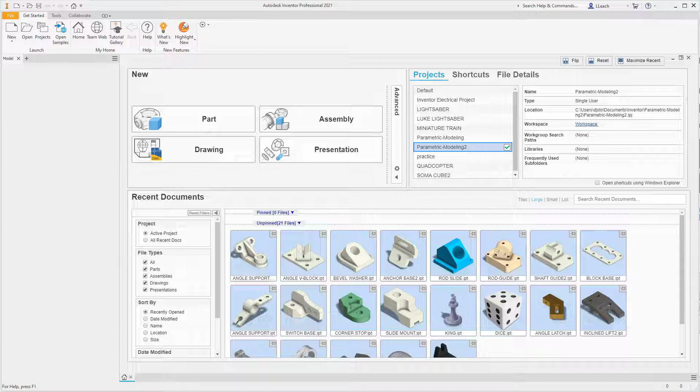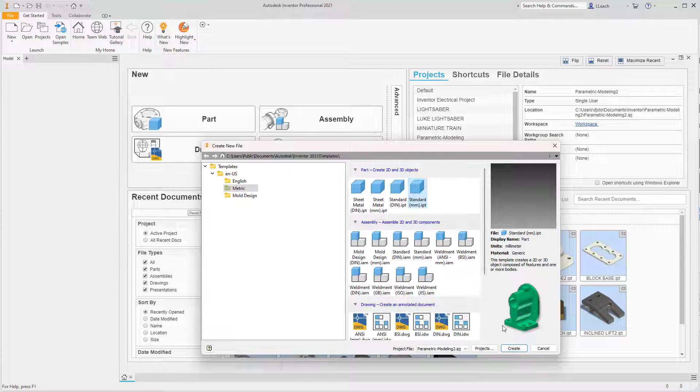What we're going to do first, we're going to go up to new. This one is going to be metric, so we're going to do this in millimeters. Metric, standard millimeters. I'm going to hit create.

I'm going to start my 2D sketch on this YZ plane, because we're going to get jiggy on the YZ plane. Then what I'm going to do is just start by drawing using the line tool.

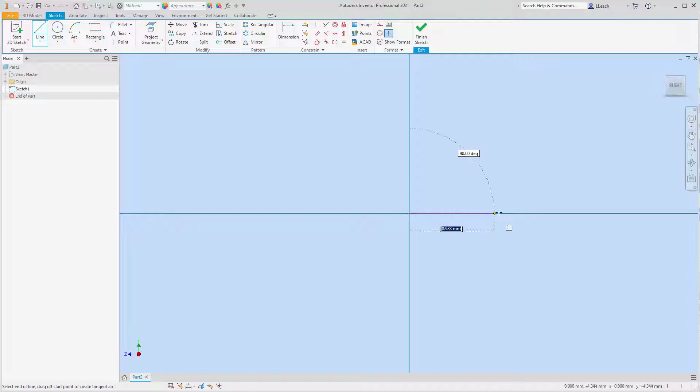Let's see, what can I do? I'm going to start it here at this center dot. I'm going to drag over to the right and then down. I'm going to come way over here. I probably should have drawn this bigger. I'm going to come up a little bit, over to here a little bit, and angle it up to here.

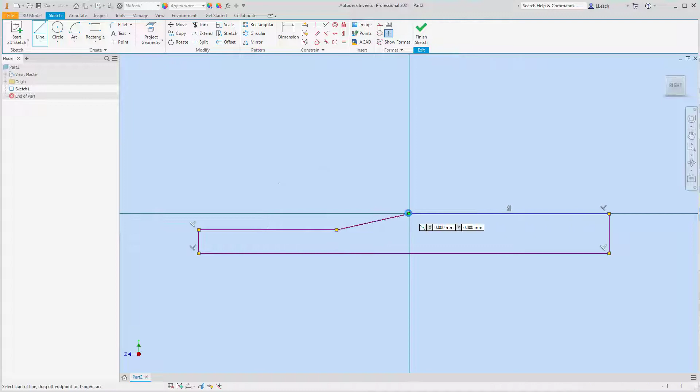That's probably the worst sketch in the history of mankind, but now I'm going to add my dimension. So this dimension here is 100, and I was not even really close. 100.

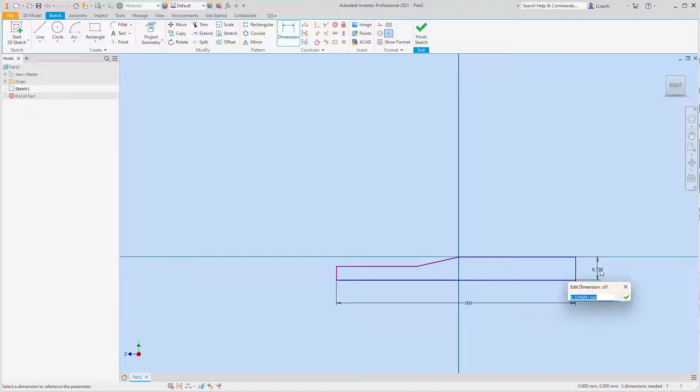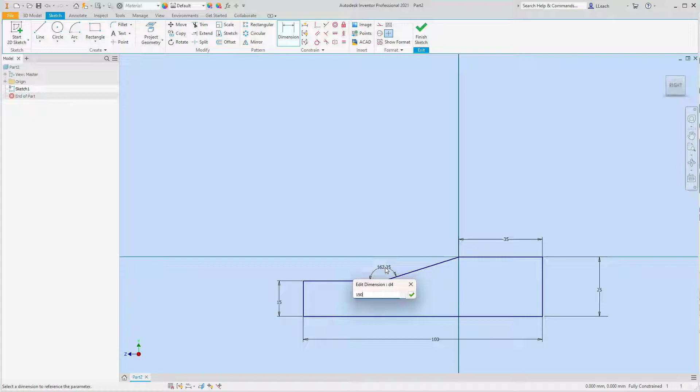Millimeters. This is 25 millimeters. This here is 15. Let's see, here from here to here is 35. And then I need that angle. Oh yeah, so the angle from here to here, this angle is 150. So there's our kind of side view.

What I'm going to do here is finish my sketch. I want to extrude this, extrude it back the other way, and that has a depth of 75. Hit OK.

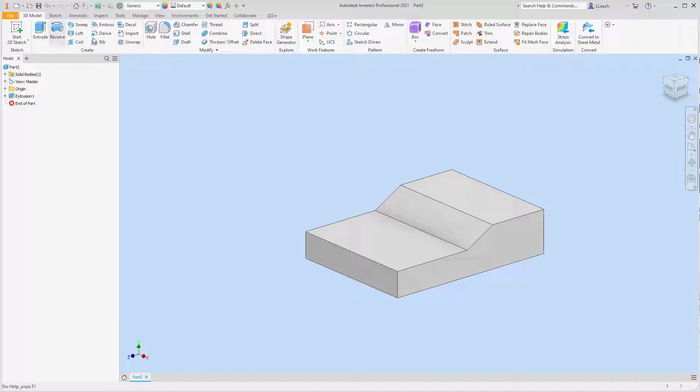So there's a good start. Let's see what we're going to do next. I'm going to start my 2D sketch on this kind of lower plane here, and then draw a rectangle with a 2-point option.

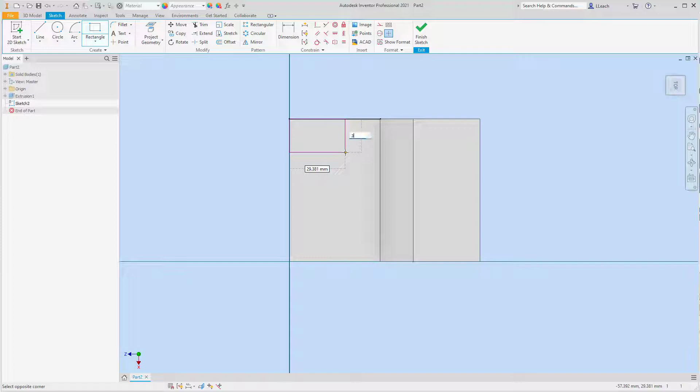I'm going to start at this corner here. Make sure you get that green dot and just kind of drag it. So the dimension on the right, that's going to be 30. Hit the tab key, now I can dimension this side, one is 35. Hit the tab key, press enter.

I'm going to finish my sketch. I'm going to extrude cut that all the way through, so I got the cut, I got the through all option. I'm going to hit OK.

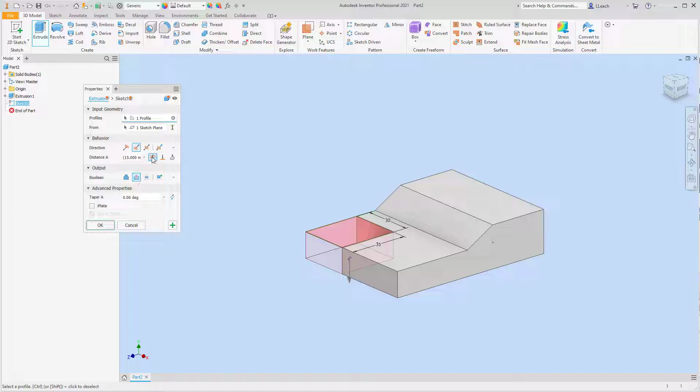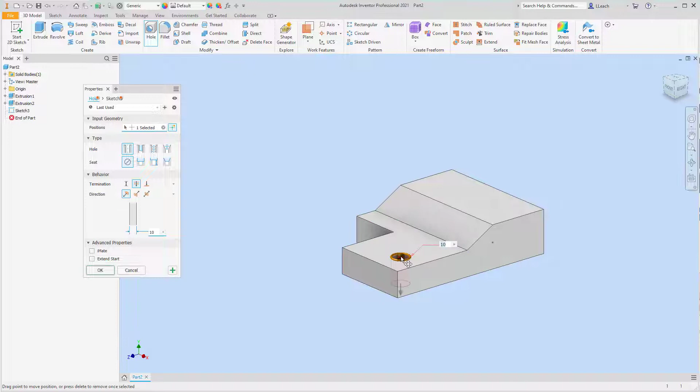Then I'm going to add the holes while we're here. So I'm going to click on the hole. Those have a diameter of 10, which it's already 10 right there. So 10, it's going to go all the way through. I'm just going to click somewhere on this kind of area here. So the dimension from the front edge, that's 10, and then to the side over here, that's 15. I'm going to hit OK.

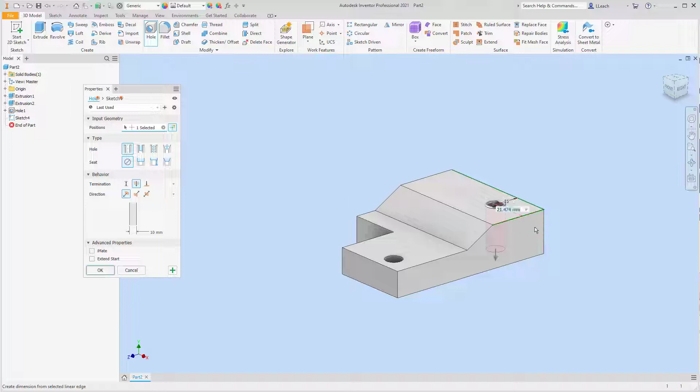I'm going to do the hole again. I'm going to put one up here on this top. That has the same diameter, and then it's 15 millimeters off of each side. So off this back side edge, that's 15, not 14, 15. Off of this side edge here, that's 15. And then it goes all the way through. I'm going to hit OK.

So there's that. All right, so here is where it gets kind of dicey. What I'm going to do here is start my 2D sketch on this kind of side face here.

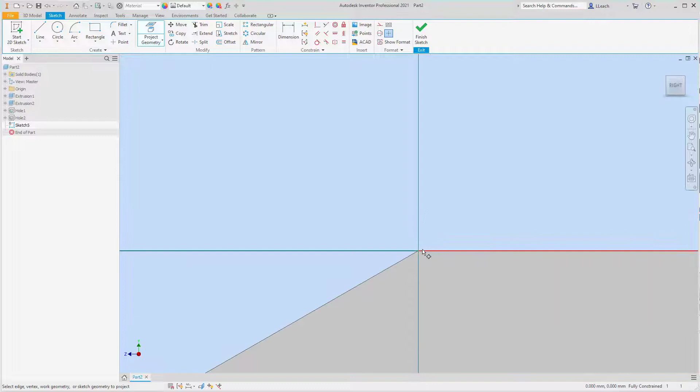I'm going to project this dot here. Can I project that dot? There's a dot there. Actually, I don't need to project that dot because I drew that right on the origin, so maybe I can get away with that. I'm going to project this line, and then offset that line down. That's going to be 5.

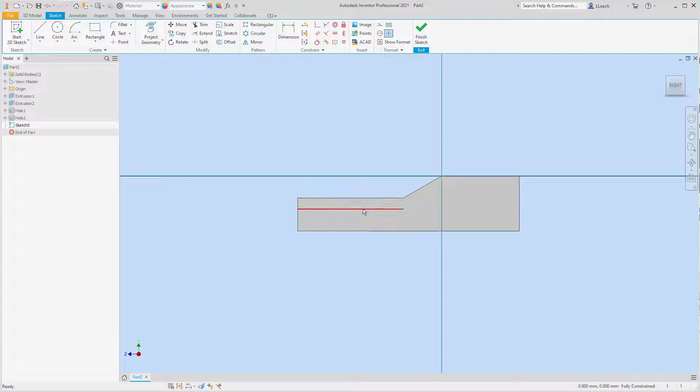Let me get rid of that, I don't need this line here now. This line here I want to turn into a center or construction line. So I just clicked it and hit construction line.

Then I'm going to draw a circle just out to the side somewhere, with a radius of 25, or a diameter of 50.

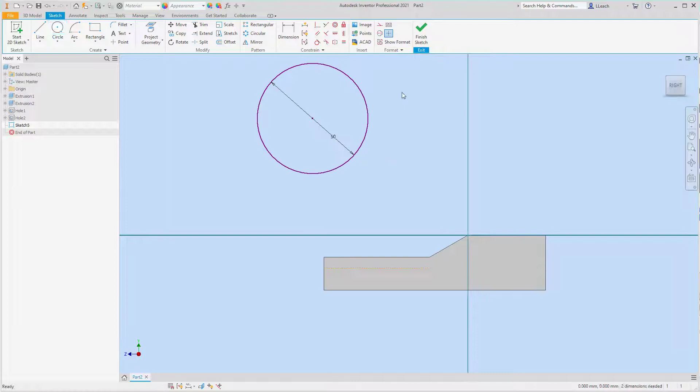Then I'm going to use the tangent constraint. I'll click the circle, then click this construction line, so it brings it down tangent to that line.

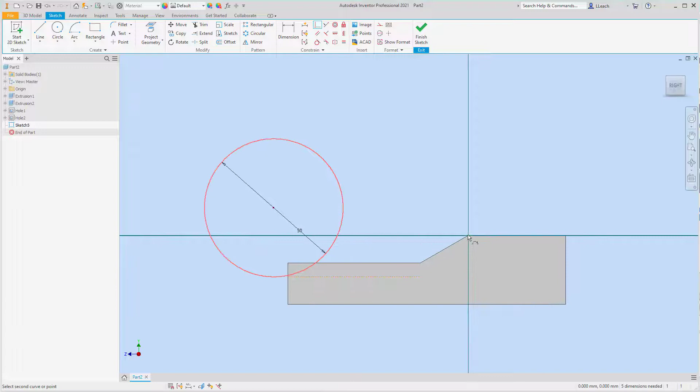Then I'm going to try to use the coincident constraint. I'll click on the circle here, and I click on this kind of corner here, right there. So that moves my circle over to right where I want it.

Then I can finish my sketch. I'm going to extrude cut, cutting that going back, with a distance of 25.

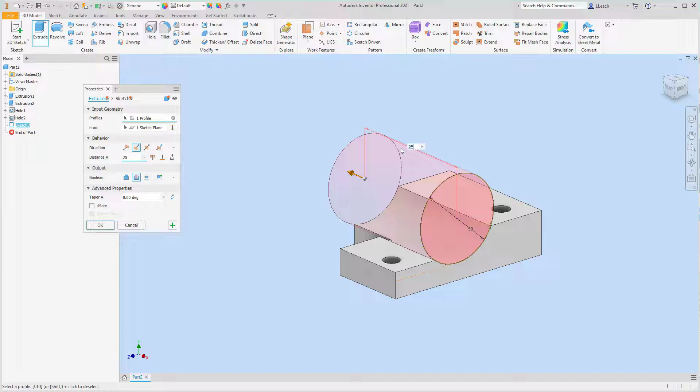Wait, 25, come on, 25, like so. I'm going to press OK. So I cut that little extrusion out.

What I want to do now is start my 2D sketch on this kind of ramp plane here, and then use an arc, the center point arc.

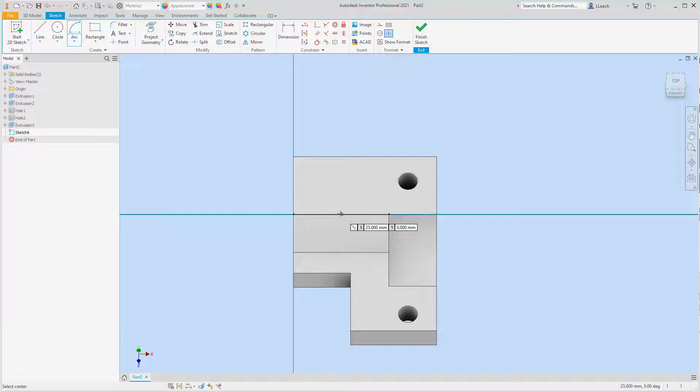I'm looking for this middle green dot of this line here. I'm going to click that, and just click the endpoints of this line, drag it around to this side. Hit that, finish sketch.

I want to extrude this down, and I'm going to click the To option so it goes to whatever the next surface is.

Click that. Wait, I want to make sure. Okay, let me do it this way. Oh, I want to go to, yeah, there. Did that work? Yeah, to that.

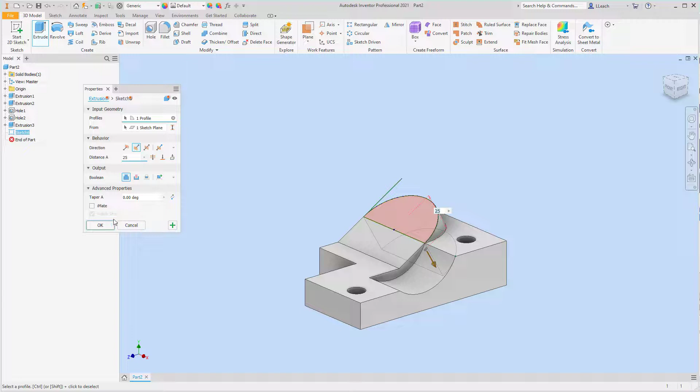Got kind of weird on me at first. Or you could just pick the plane that you want to extrude it down to. So there's that part, and then all we need to do is create our hole.

So let me see if I can do a hole, and that's going to be a diameter of 20. Then we want it to go all the way through.

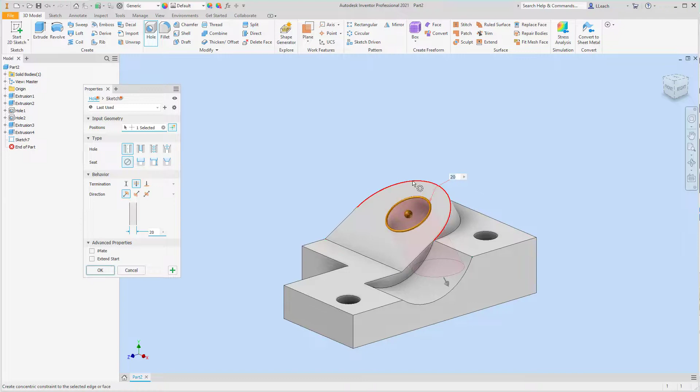I'm just going to click on the surface, and then click on this kind of rounded edge here so that it creates our hole with a 20 millimeter diameter. We're going to go all the way through, hit OK.

So let me take a look and see. Yeah, we got that all the way through. So there is our jig base.

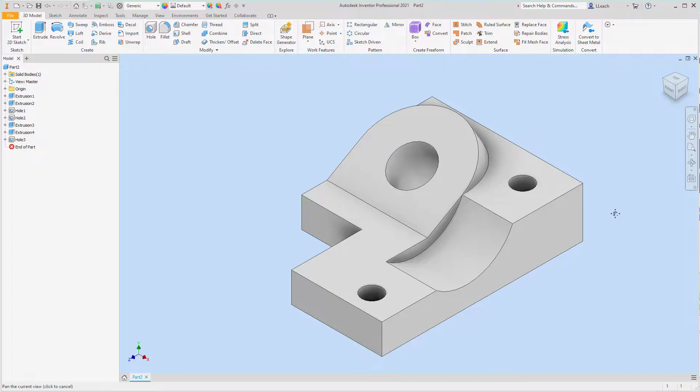Just double checking to make sure we got it. So then I'm going to go up to view, just kind of fancy it up. Add some shadows, reflection if you want. Change the lighting here to whatever suits your fancy.

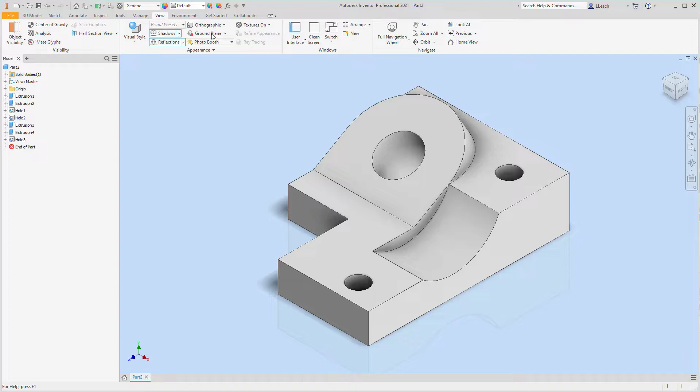Click photo booth. Yeah, okay, well go up to default here. You can pick a color or material, or I'm going to do my usual, if I can find it, smooth ivory here. So there we go.

I click home to center this thing, and just make sure you save it. We're going to call it Jig Base. All right, hit save.

So there we go, that wasn't too bad actually. It looks complicated, but it really wasn't as bad as what I was thinking originally. So I hope that helped.